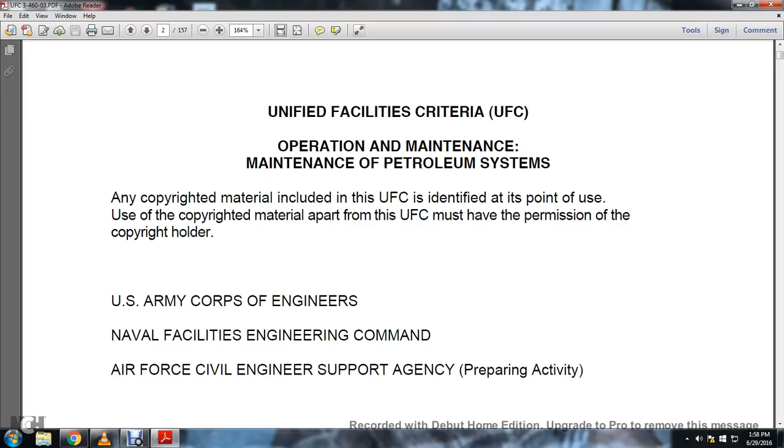U.S. Army Corps of Engineers, Naval Facilities Engineering Command, Air Force Civil Engineer Support Agency.

Record of changes and locations. The format of the document does not conform to UFC 1-300-01. It will be reformatted in the next revision. This UFC supersedes AFM 85-16, Maintenance of Petroleum Systems.

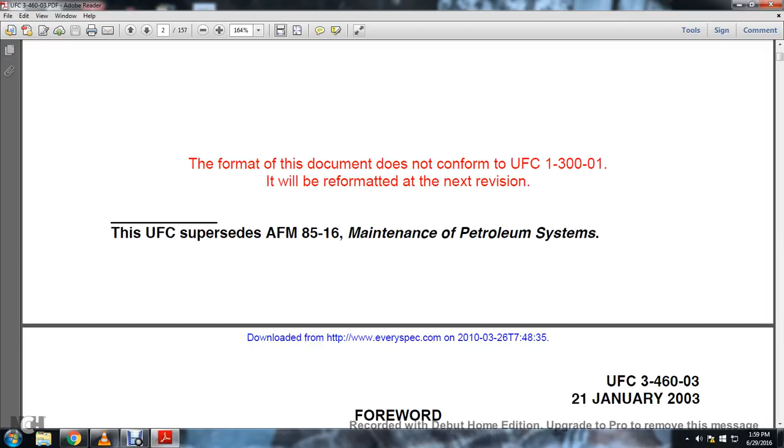Foreword. The Unified Facilities Criteria system is prescribed by Military Standard 3007. It provides planning, design, construction, sustainment, restoration, and modernization criteria,

and applies to the military departments, the defense agencies, and the DoD field activities in accordance with the Under Secretary of Defense for Acquisition, Technology and Logistics memorandum dated 29 May 2002.

The UFC will be used for all DoD projects and work for other customers, where appropriate. All construction outside the United States is also governed by Status of Forces Agreements, host nation funded construction agreements,

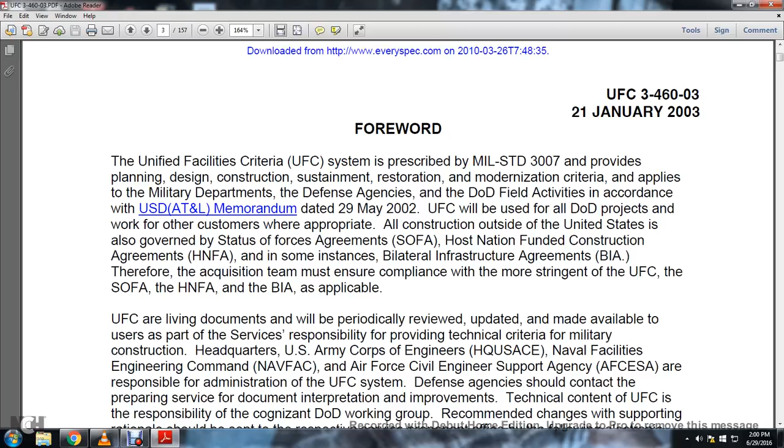and in some instances bilateral infrastructure agreements. Therefore, the acquisition team must ensure compliance with the more stringent of the UFC, the Status of Forces Agreements, host nation funded construction agreements, and bilateral infrastructure agreements, as applicable.

UFC's are living documents and will be periodically reviewed, updated, and made available to users as part of the Services' responsibility.

Provide technical criteria for the military's construction. Headquarters of the U.S. Army Corps of Engineers, Naval Facilities Engineering Command, and Air Force Civil Engineer Support Agency are responsible for administration of the UFC Unified Facilities Criteria system.

Defense agencies should contact the preparing service for document interpretation and improvements. Technical content of the Unified Facilities Criteria is the responsibility of the cognizant DoD working group.

Recommended changes with supporting rationale should be sent to the respective service's proponent office following the electronic form: Criteria Change Requests, CCRs. The form is also accessible on the internet sites below.

UFC's are effective upon issuance and distributed by electronic media via the Whole Building Design Guide website, dod.wbdg.org. Hard copies of UFC printed from electronic media should be checked against the current electronic version prior to use to ensure they are currently authorized.

Authorized by Donald L. Basham, Dr. James Wright, Dr. Get W. Moy, and Kathleen Ferguson, P.E.

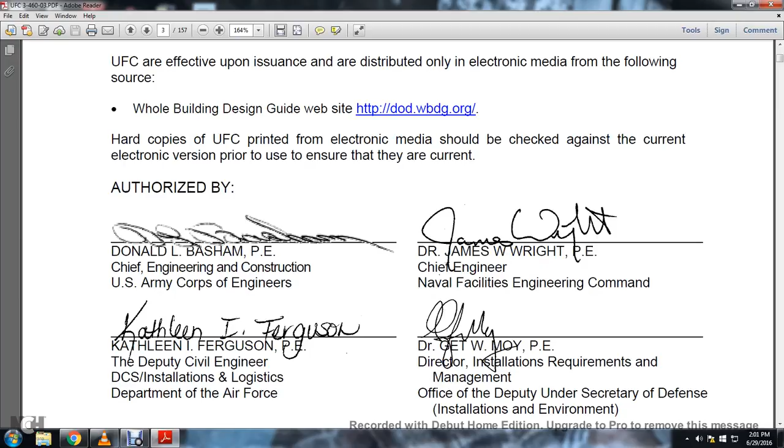Civil Engineering, Maintenance of Petroleum Systems. Compliance with this publication is mandatory. Headquarters AFCESA, CESM, Mr. Pat Mumme. Supersedes AFM 85-16 of August 18, 1981.

The manual implements Air Force Policy Directive 32-10, Installations and Facilities, and provides guidance for base and command liquid fuels maintenance personnel, and procedures for field maintenance of permanently installed Air Force owned, leased, or controlled petroleum storage and dispensing systems.

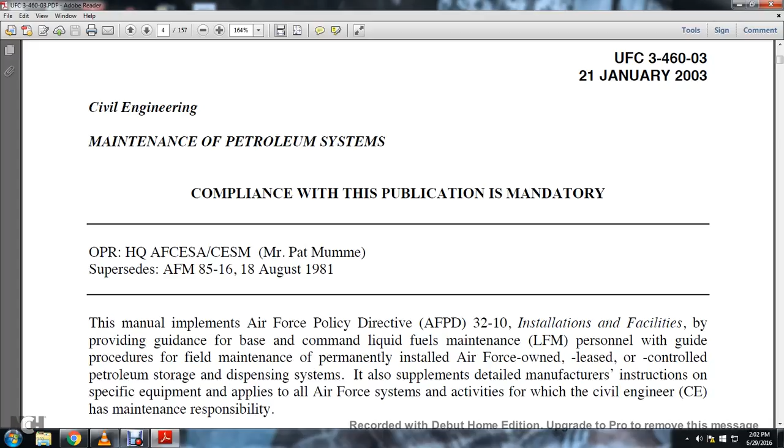It also supplements detailed manufacturer's instructions on specific equipment and applies to all Air Force activities for which the civil engineer has maintenance responsibility.

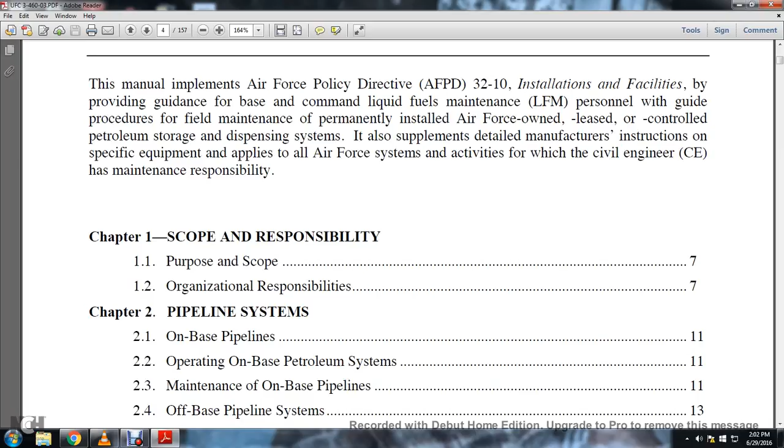Chapter 1, Scope and Responsibility: Purpose and Scope, Organizational Responsibilities.

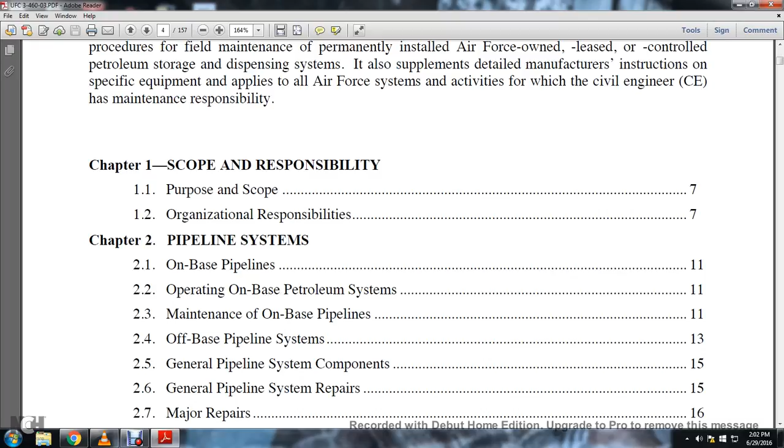Chapter 2, Pipeline Systems: On-Base Pipelines, Operating On-Base Petroleum Systems, Maintaining On-Base Pipelines, Off-Base Pipeline Systems, General Pipeline System Components, General Pipeline System Repairs, Major Repairs, and Pipe Cleaning.

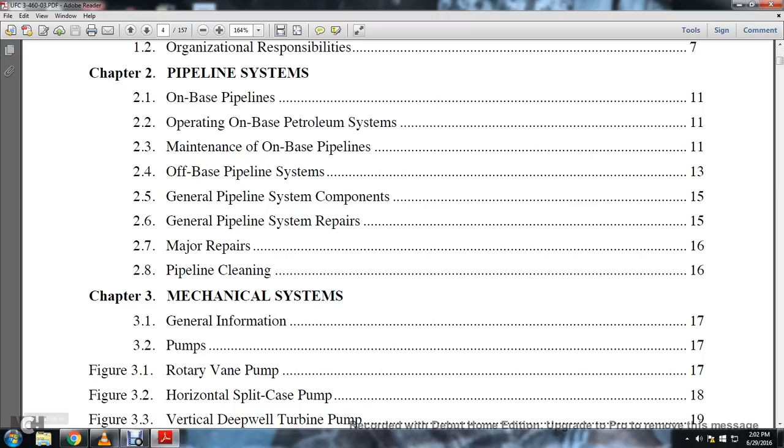Chapter 3, General Information: Pumps, Rotary Vane Pumps, Horizontal Split Case Pumps, Vertical Deep Well Turbine Pumps. Figure 3-4, Hydraulic Gradient; 3-3 Filter Separators; 3-4 and 3-5, Valves.

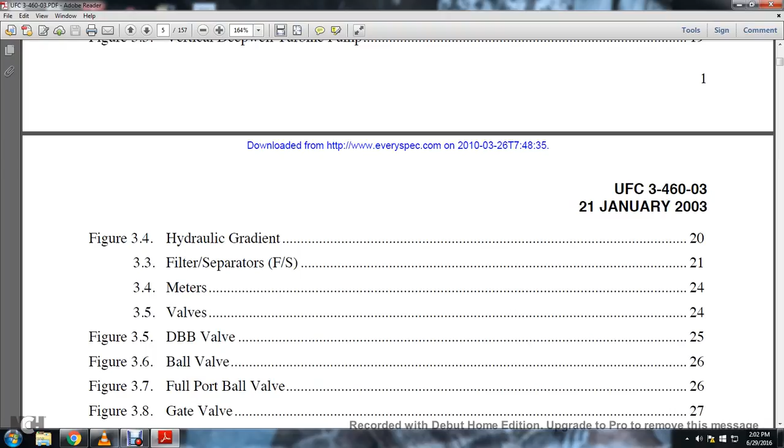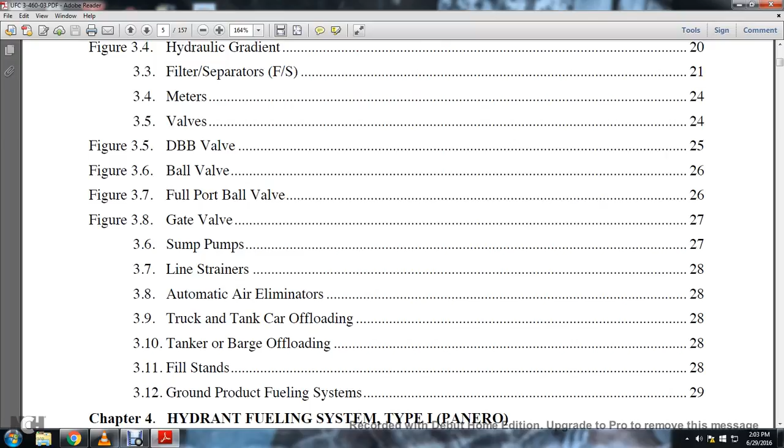3-5 DBB Valve; Figure 3-6, Ball Valve; 3-7 Full Port Ball Valve; 3-8 Gate Valve; Sump Pumps, Line Strainers, Automatic Air Eliminators, Truck and Tank Car Offloading, Tanker Barge Offloading, Fill Stands, Ground Product Fueling Systems.

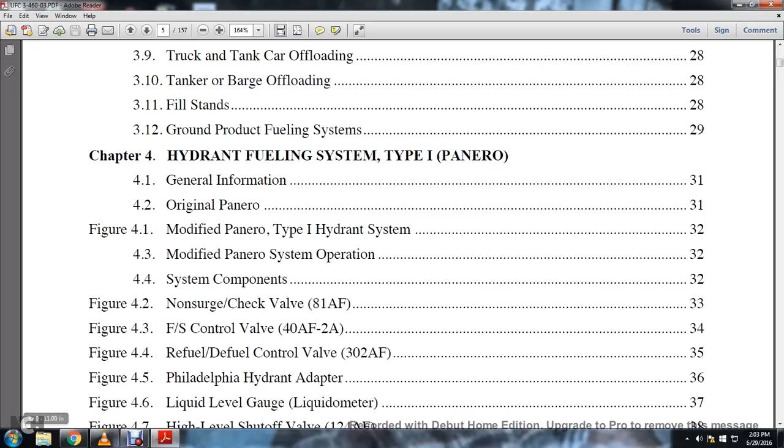Chapter 4, Hydrant Fueling System Type 1, Panero. General information, original Panero, modified Type 1 hydrant system, modifying Panero system. Operation, system components, non-surge check valve, filter/separator control valve, refuel and defuel control valve, Philadelphia hydrant adapter liquid level gauge, Liquidometer, high level shutoff valve.

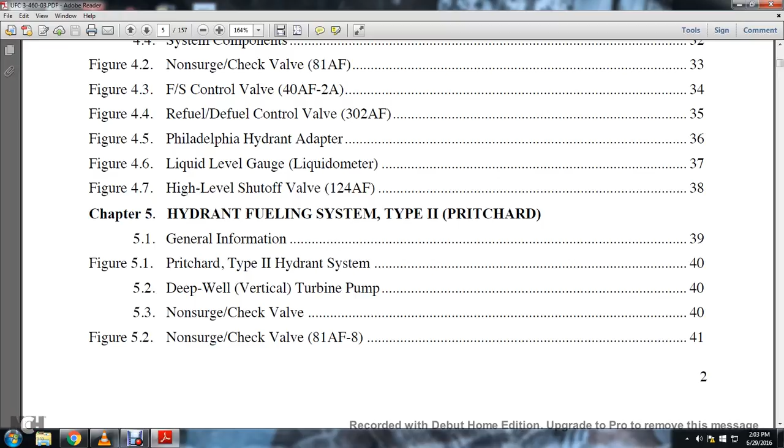Chapter 5, Hydrant Fueling System Type 2, Pritchard. General information, Pritchard type hydrant system, deep well and vertical turbine pump, non-surge check valve.

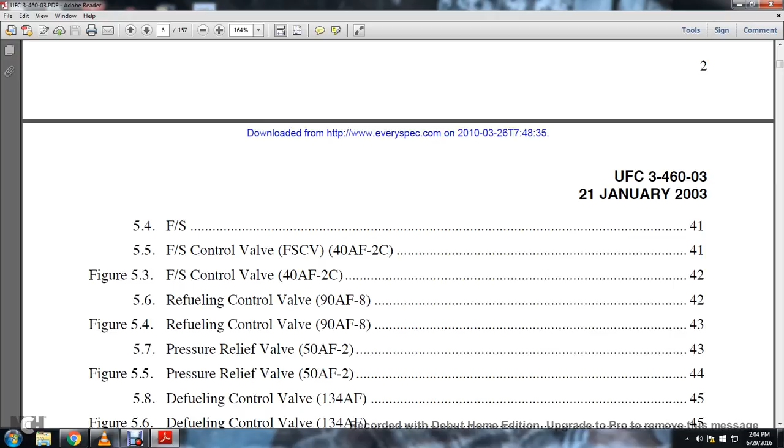Filter/separator and filter/separator control valve, figure 3 filter/separator control valve, refueling control valve, figure 4 control valve, refueling control valve, pressure relief valve, figure 5 pressure relief valve.

Defueling control valve, figure 5-6 and 5-7 dual rate of flow control valve, recommended setting procedure for the rate of flow control valve, defueling pump.

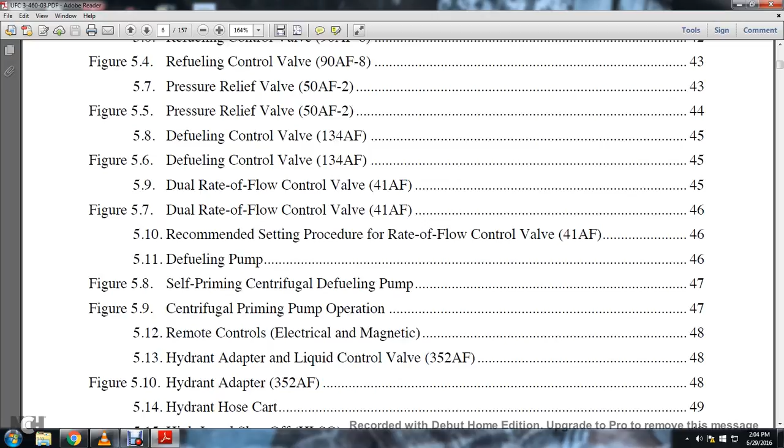Figure 5-8 self-priming centrifugal defueling pump, figure 5-9 centrifugal priming pump operation, 5-12 remote controls electrical magnetic, figure 5-13 hydrant adapter and liquid control valve, figure 5-10 hydrant adapter, figure 5-14 hydrant hose cart, figure 5-15 high level shutoff.

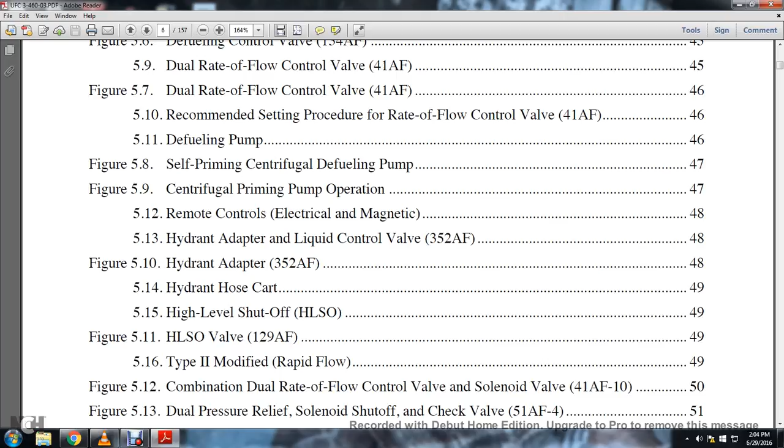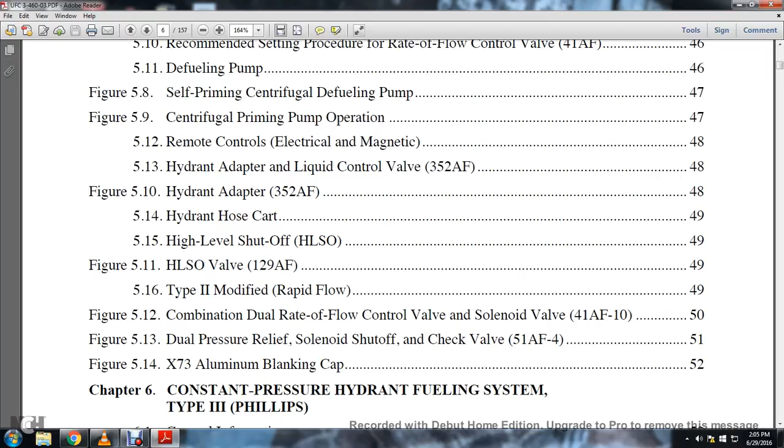High level shutoff valve, HLSO, Type 2 modified rapid flow, figure 5-12 combination dual rate of flow control valve, solenoid valve, figure 5-13 dual pressure relief solenoid shutoff and check valve, figure 5-14 X73 aluminum blanking capping.

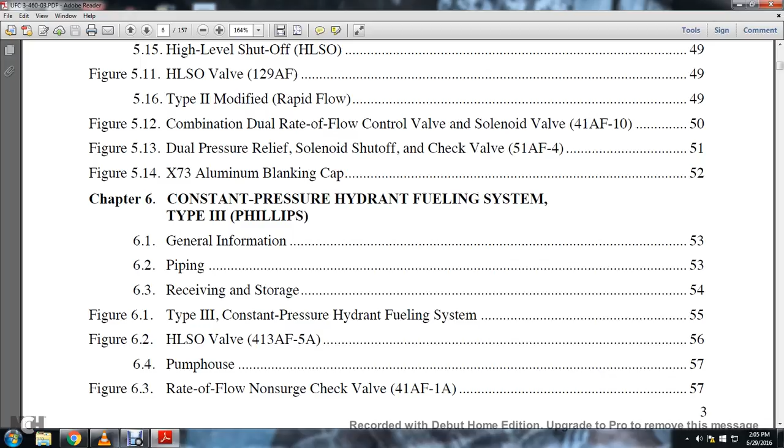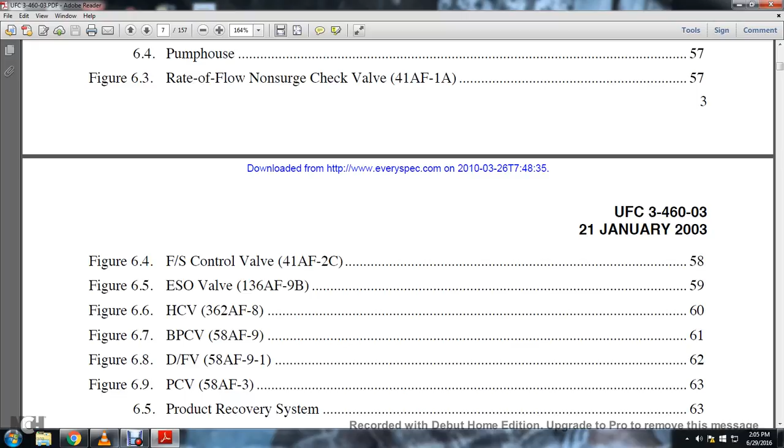Rate of flow, non-surge and check valve, the filter separator control valve, the ESO valve, the HCV valve, the BPCV valve, D/FV valve, PCV valve.

Product recovery system, sequence of operation, leak detection.

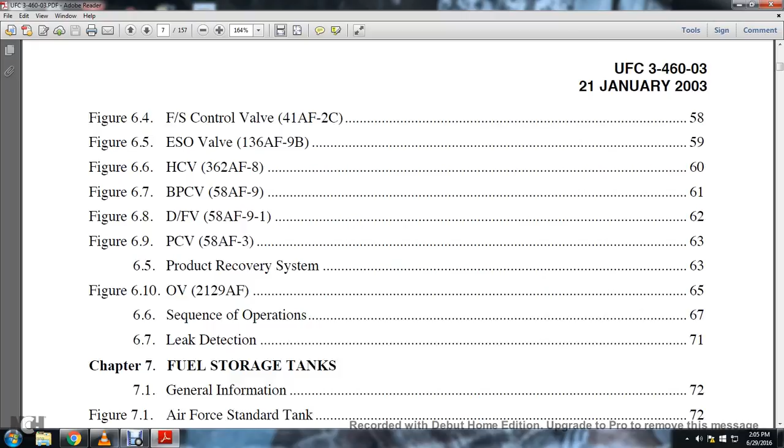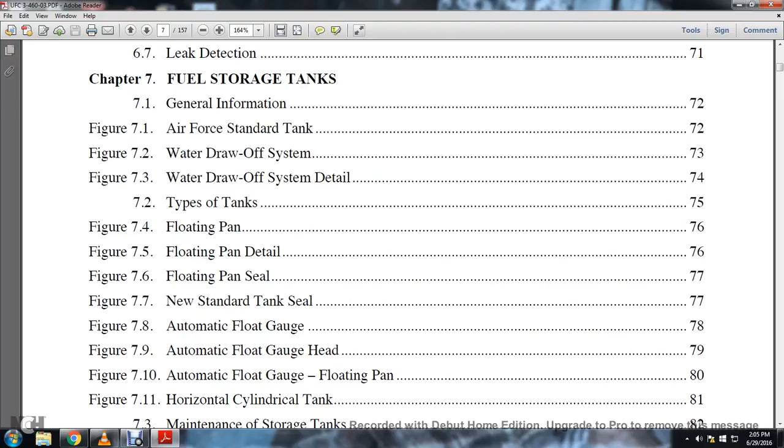Fuel storage tanks, general information, Air Force standards, water draw-off system, detail type of the tanks, floating pan detail, floating pan seal, new standard tank seal, automatic float gauge head, automatic float gauge, floating pan, horizontal cylindrical tank.

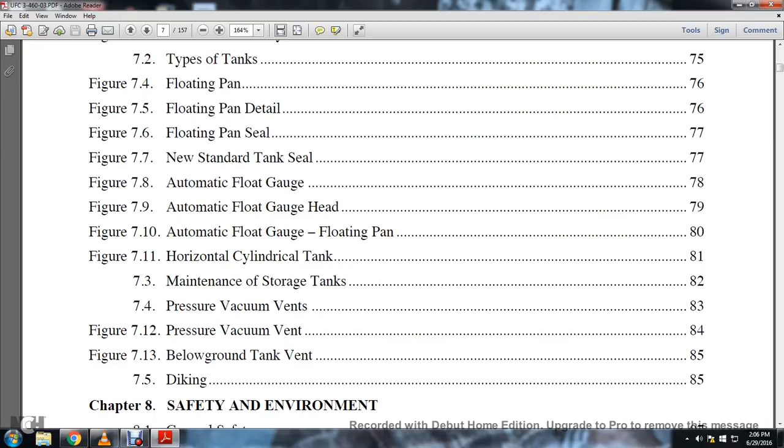Maintenance of storage tanks, pressure vacuum vents, figure of belowground tank vent, and diking.

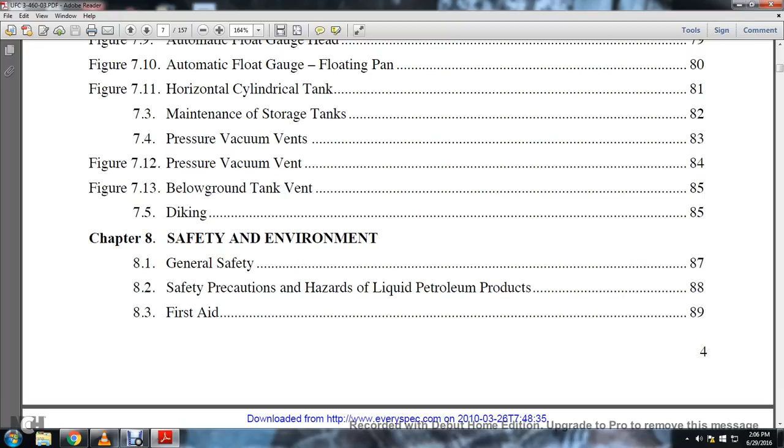Chapter 8, Safety and Environment. General safety precautions, hazards of liquid petroleum products, first aid, preventing petroleum fires.

Chapter 9, Electrical Grounding and Bonding. General information, static charge generation in refueling systems, preventing static electricity, relaxation, release of electrostatic energy.

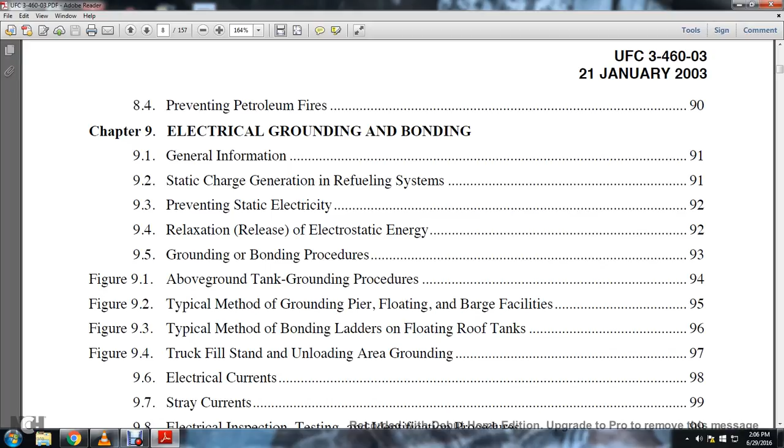Grounding or bonding procedures above ground, tank-grounding procedures, typical method of ground pier, floating barge facilities, typical method of bonding ladders on floating roof tanks, truck fill stand and unloading area grounds, electrical current, stray currents.

Electrical inspection, testing and identification procedures.

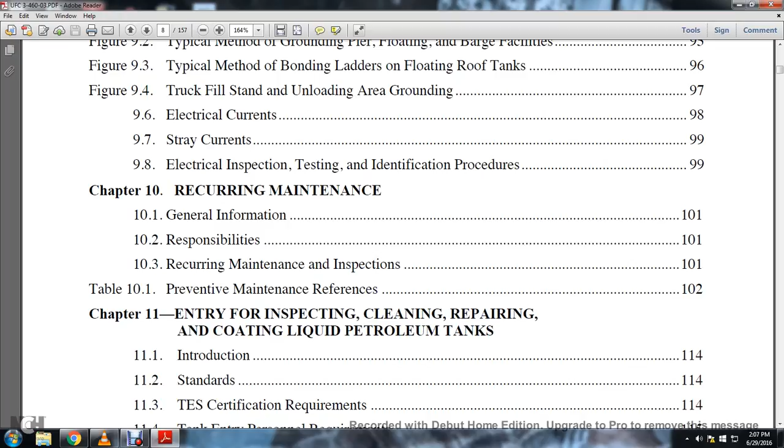Chapter 10, Recurring Maintenance. General information, responsibility, recurring maintenance and inspection, Table 10.1, preventive maintenance references.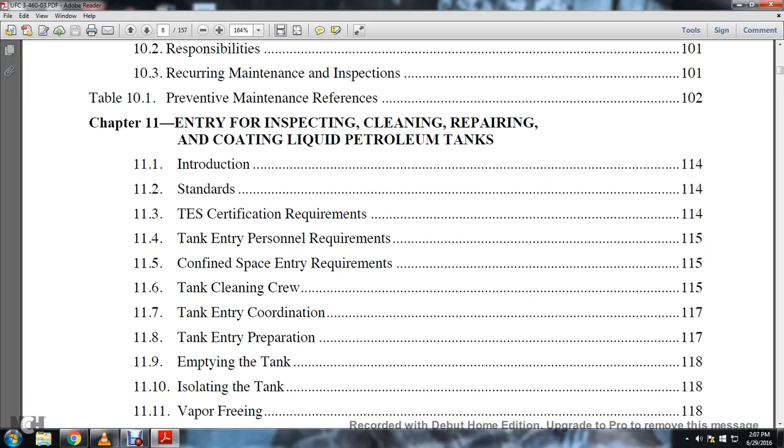Chapter 11, Entry for the Inspection, Cleaning, Repair, and Coating of Liquid Petroleum Tanks. Introduction, standard TES certification, tank entry, personnel requirements, confined space entry requirements, tank cleaning crew, tank entry coordination, tank entry preparation, empty the tank, isolating tank, vapor freeing.

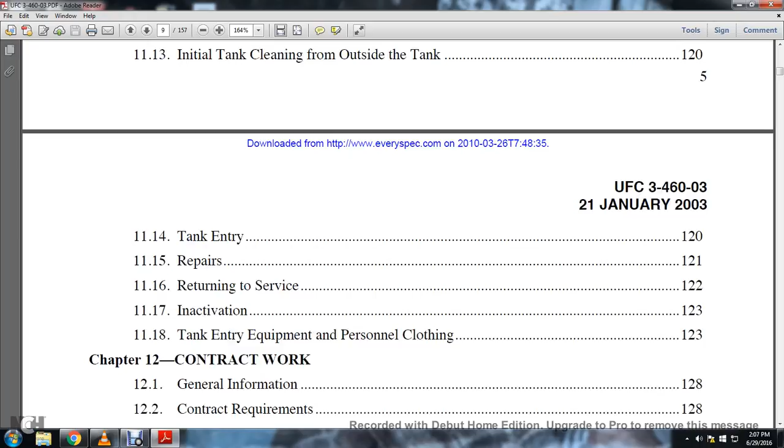Atmosphere testing, initial cleaning from the outside of the tank entry, repairs, returning to service, inactivation, tank entry equipment, personnel clothing. Chapter 12, Contract Work. General information, contract requirements, TES, and Air Force forms prescribed.

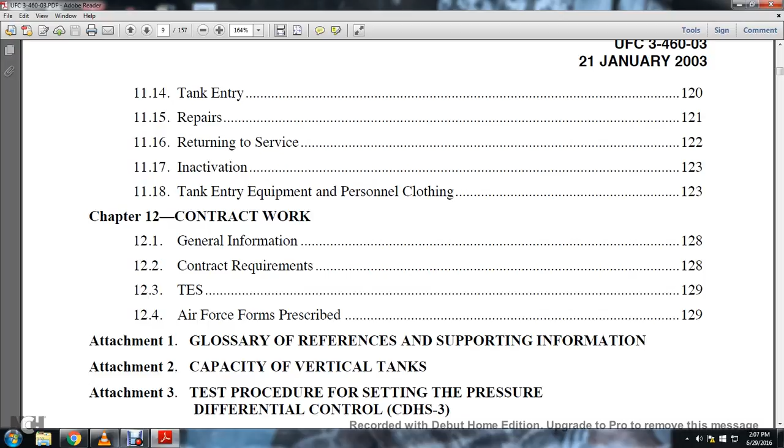Attachment 1, Glossary of Reference Supporting Information. Attachment 2, Capacity of Vertical Tanks.

Attachment 3, Testing Procedure for Setting of the Pressure Differential Control. Attachment 4, Suggested Valve Tagging Method.

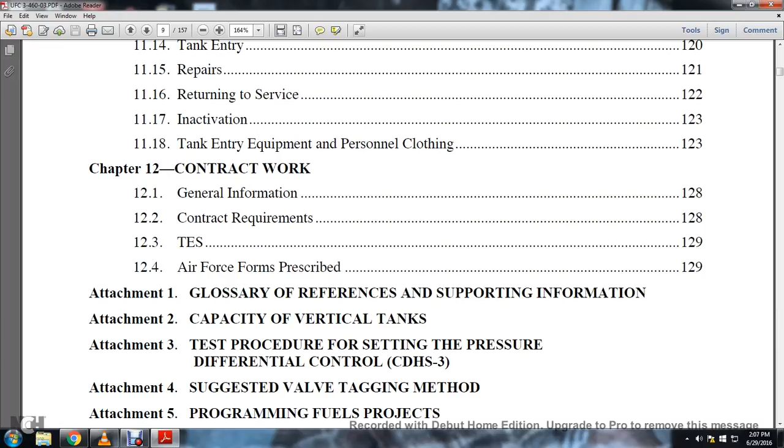Attachment 5, Programming Fuels Projects. Attachment 6, Tank In-Service Inspection Checklist.

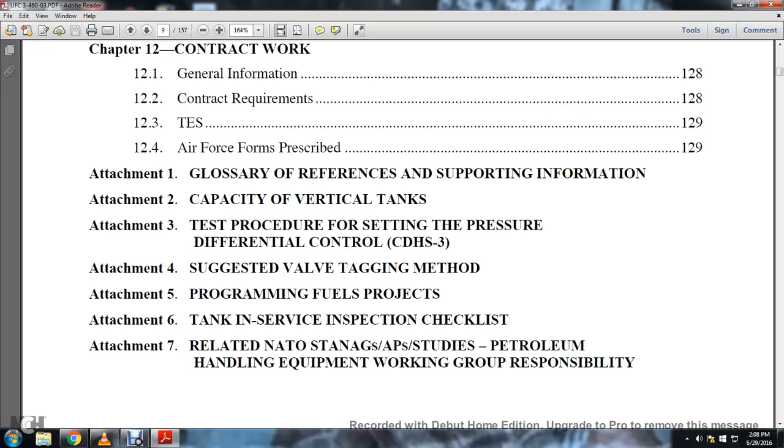Attachment 7, Related NATO STANAGs/APs/Studies and Petroleum Handling Equipment Working Group Responsibility. Chapter 1, Scope and Responsibility.